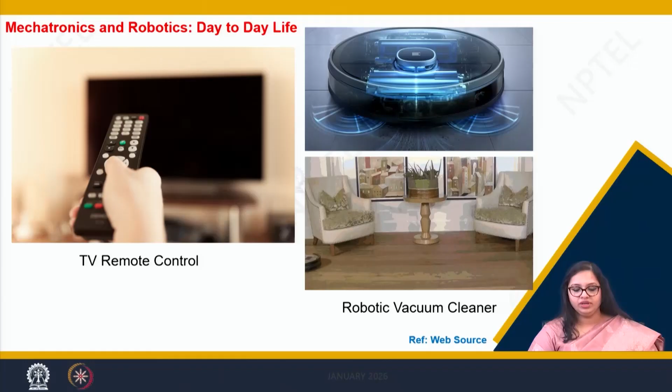Now, when we talk about the mechatronics and robotics application in mining industry, well, we have studied about dump trucks, where we know that dump truck is one of the most used transport machinery for transportation of material from one point to the other, and there may be various issues. Let's say there may be tire wear and tear issues, or fuel theft issues, or delay due to the irresponsibility of the drivers. Even there may be few accidents due to

many unwanted conditions. So it was very much necessary to make this kind of machine autonomous, which comes under the autonomous hauling system. Dump trucks we also call haul trucks. Making this haulage system was easier, as it is a repetitive process, and it was first made by Modular Mining Systems in 2011, where their system was installed in one of these Komatsu dump trucks, which is an unmanned surface haul truck. So it is one of the robotic vehicles used in surface mining applications.

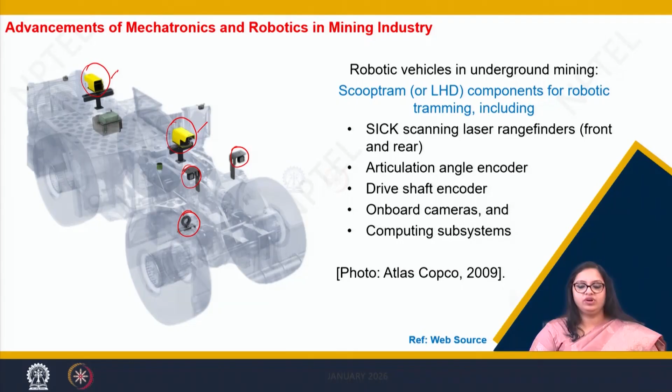So this kind of setup was developed by Atlas Copco in 2009. So this is one of the best examples of robotics that has been already established in underground mining. We may not be able to see this application in India, however, in different parts of the world, in various countries, this kind of technology has already been developed.

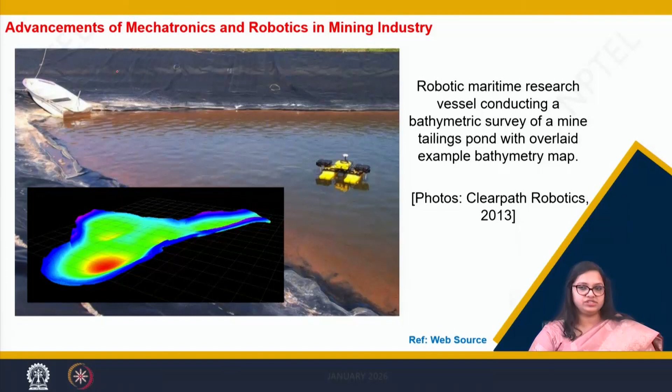Again, this project was by a company called Clearpath Robotics, and this photo was taken from their work that has been done in 2013. So now many works have been made easier due to the application of mechatronics and robotics in mining industry. It is no more as hazardous or dangerous as we have been perceiving.

Well, when we talk about why this evolvement of robotics is necessary, the first concern is the working environment. We know that there is a lack of workers. There are many officials or engineers who do not want to join the mining industry just because they are scared of this working environment. However, with the introduction of robotics, it would make the working environment in a mining industry much safer and cleaner, which will attract the best brains to work in this exciting environment.

Now there is labor shortage, as I mentioned. Due to this working environment, there is labor shortage, there is concern for health and safety, and that also affects the operational efficiency. If a working environment is not safe and is hazardous or dangerous to the workers who are working in that environment, it would also reduce the efficiency, leading to losses.

Now also the sustainability, which is a very big topic nowadays. This also plays a vital role in why robotics needs to be introduced in the mining industry, because if such technologies do not take up the mining industry, or we do not move to industry 5.0, then sustainability would be a big issue, and people would not be moving towards contributing to the development of these sectors.

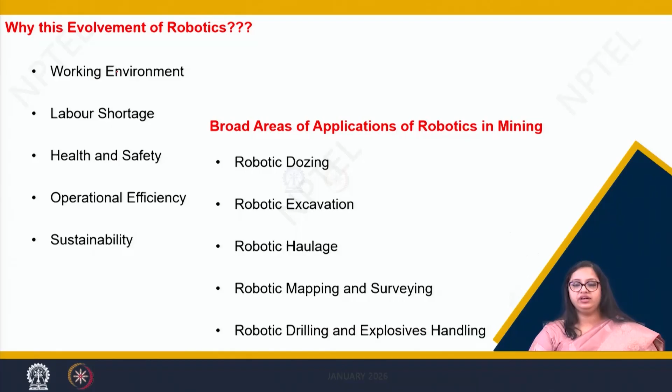Hence the broad areas of application of robotics in mining, which have already been done to a certain extent and can be more explored, are robotic dozing, which is a repetitive process that can be handled by robotics, or robotic excavation, or robotic haulage. We will be discussing a lot about robotic haulage in this PPT. Then robotic mapping and surveying, which can very well be done by drone technology. Then robotic drilling and explosives handling.

Well, when we talk about automated haulage systems, haulage is a repetitive process to which automation can bring significant benefits, particularly with respect to safety. When we talk about safety, haul trucks are involved in 42% of accidents and 60% of fatalities in surface mining conditions. Hence, if the haulage system is automated, productivity, repeatability and reduced maintenance cost would generate a lot of benefit.

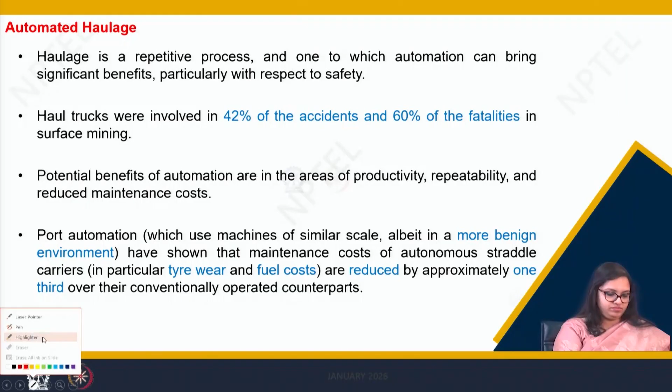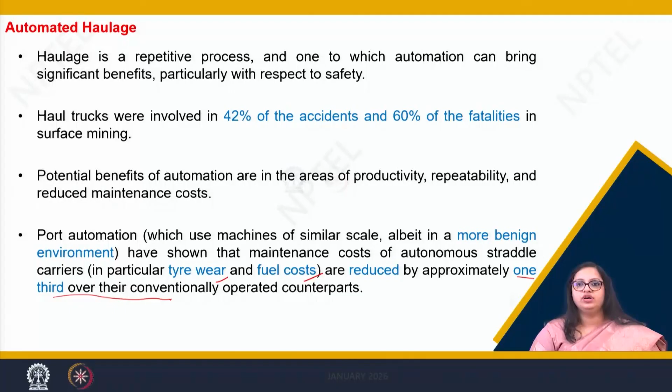Now, for automated haulage, port automation is one example, which is in a more benign environment. It has shown that maintenance costs of autonomous straddle carriers, in particular the tire wear or the fuel cost, are reduced by approximately one third over their conventionally operated counterparts. So automation in haulage systems, in port automation, has proved its potential of being used in the mining environment.

Now, while we talk about the mining environment where this automated haulage system should be introduced, there are certain unique challenges present in surface mining conditions which may not be present in other robotics applications. So, what are they? First is the scale. The haul truck carries up to 400 tons of material. So, if anything goes wrong, there will be huge loss of life and property.

Again, the mining pit, sometimes due to its depth, is restricted in GNSS reliability. So that is how the automated haulage system may get affected due to the depth of the mining pit, where getting signal sometimes gets difficult.

Now, when we talk about surface mining conditions, they are constantly changing. It is not like we are just staying at one place and working repetitively; this mining environment is always changing because the bench would be moving, and so the roads, approach roads and exit roads would also be changing.

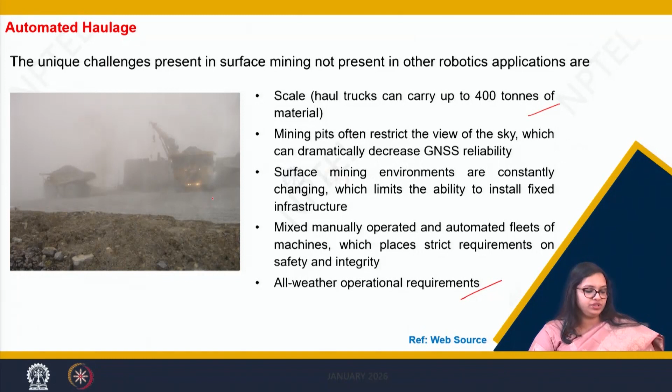So, in all weather, let's say you see here it is very foggy, so it may not be possible for the sensors to work properly so that the haulage system can move from one location to the other. Let me show you one example of a fleet management system that may be affected due to all weather conditions. Now, here you can see there is a rope shovel which is dumping the material into a haul truck. Now, how are both shovel and dump truck automated?

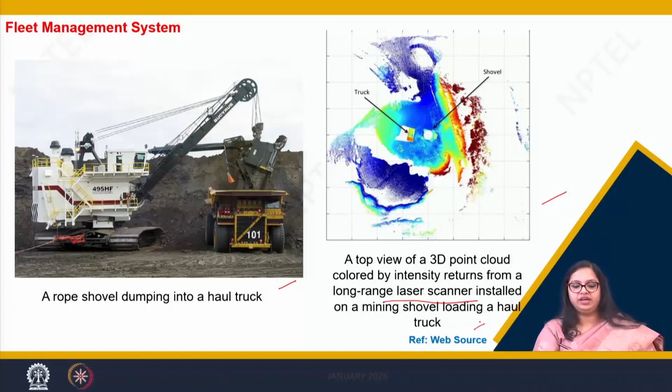Now, robotics and automation are also very helpful for the self navigation of the vehicles in the work zone and also in the approach or exit paths. So as you can see here, this is how the traffic is managed when there are automated loading units and truck interaction units. So how does it happen? Let's say at the face there is a shovel which is working, and it has different zones. One is a work zone, one is a handover zone, and one is a non-working zone.

So you can see there is a shovel operating at the face of the bench, and there is one incoming truck which moves from the handover zone to the zone where this shovel would be able to load the material into this dump truck, and then it takes a turn in the work zone and goes out through the outgoing path. So this complete thing is mapped by GNSS technology or laser scanners, which helps in appropriate movement of the machines inside a specific zone.

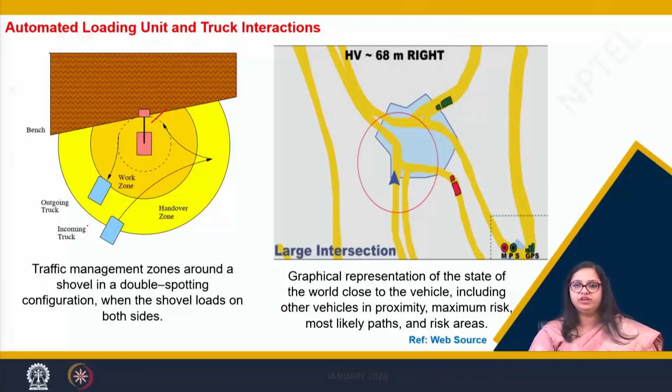Now when we talk about this GNSS technology, there may be multiple approach roads through which multiple trucks or vehicles would be coming. Now these trucks are also automated. When they are automated, it optimizes the fuel cost and reduces fuel theft, and when there are multiple vehicles at different speeds approaching a junction, they will be able to control their speed appropriately so that they can avoid any kind of collision. So this is done completely with the help of robotics and automation, where this kind of technology can help in smooth operation and movement of the vehicles inside a mining environment.

Now coming to another example of telerobotic rock breaking. So here you can see there is a rock breaker which is on an elevated platform and onto a grizzly. So here you can see it is a grizzly. Onto the grizzly there are rocks and boulders which are loaded. So this rock breaker can robotically break the rocks on the grizzly to a specific size, so that they can pass the grizzly without any human intervention. How is this human intervention avoided?

So let's say a mixed reality user interface is developed, where on a platform a rock breaker is designed and a grizzly is also designed. So you can see in this picture there are multiple cameras looking over the grizzly. Here is another camera looking over the grizzly, and while this camera takes the data, it would form a 3D image of the boulder on the grizzly, and with the help of signals this robotic breaker can be given instructions to apply this much force and attack at this angle, so that the rock boulders divide into smaller pieces.

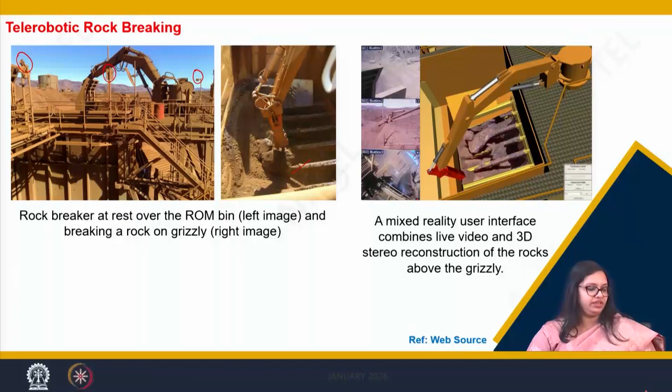Now coming to the basics of mechatronics. So what do we understand by mechatronics? Well, we went through some of these examples where we could see the applications of robotics that have already taken place, how with different technologies we can make a vehicle humanless, or we can make it unmanned and operate it without any human intervention, how we can increase the efficiency, how we can increase the safety. But what exactly is this mechatronics and how can it be utilized for such purposes?

Well, we have understood what a mechanism is, and the electronics component and the details of it you will be learning in the second half of this course, or you may be getting this knowledge from other courses. So when you add up mechanism with electronics, it gives you mechatronics. Mechatronics is enhanced mechanics with electronics. Now mechatronics does not only involve the knowledge of mechanical engineering, but it also involves the knowledge of computer engineering, electrical engineering and controls engineering.

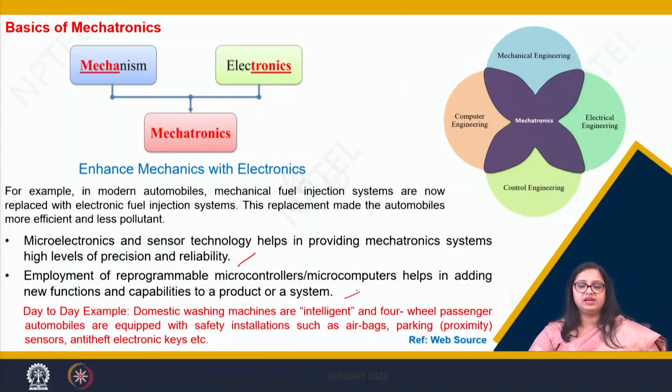Now when we talk about the components of mechatronics, one perfect example is the spring force system. This is one of the easiest problems of mechatronics, where let's say there is a spring without any particle. Now a mass is added to the end of the spring. This gives us a certain displacement. The force is the input and the displacement is the output.

When we talk about this force coming to the spring and we would like to automate it to a certain level, let's say the force is induced into the spring and it changes over time, then a system can be devised so that it will have a displacement or vibration to a certain level, and that can be automated by getting the output displacement and feeding it into a microprocessor, which would send the signal for the input force to increase or decrease, and so the process can continue. The same example we can see in a mechanical system.

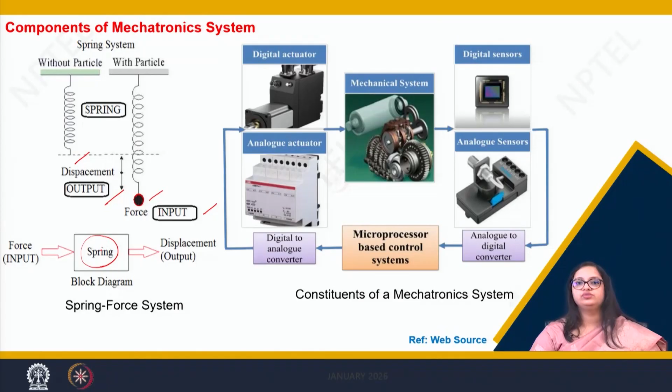Let's say it is giving to a digital actuator, so this digital to analog converter is not required in between. The microprocessor can directly give it to the digital actuator. However, if it is giving to an analog actuator, it has to convert the digital signal to an analog signal, which would give the signal to this analog actuator. Again, this analog actuator would send the signal to the mechanical system to decrease or increase the generation of the power. So this is one classical example of a mechatronics system.

Now the same thing we can see if there is a hydraulic piston cylinder system. As we have seen, many of these machines are hydraulically controlled. So this hydraulic piston cylinder system would give the signal to a piezoelectric device or a strain gauge about the displacement that is happening or the pressure that is built up inside this piston cylinder arrangement. The strain gauge or the piezoelectric device would send the signal to a signal conditioning device, which will condition the signal to a level that is readable.

Then from the signal conditioning device, the signal will go to the analog to digital converter. It is necessary because if it is an analog signal, it has to be converted to a digital signal so that the microprocessor can understand. Let's say I am from India and you are from China or some other country where we have a different language. So if I am speaking something and you are not understanding, or if you are speaking something I am not understanding, then the communication will not be effective. So that is why for a microprocessor to understand the signal, it has to be converted to the language it can understand. So an analog to digital converter is required.

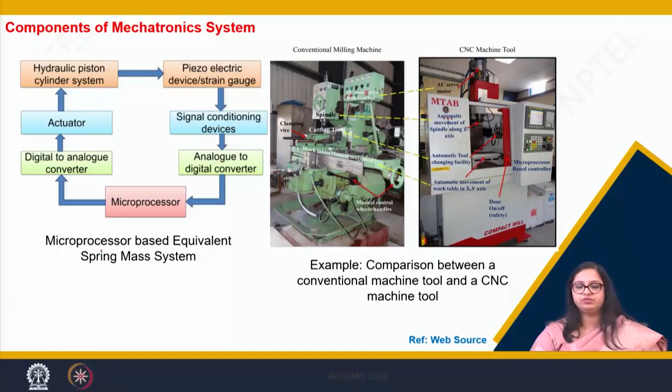Now a perfect example of all this we can also see between the conventional machine tool and the CNC machine tool. In the CNC machine tool, there is a microprocessor based controller which handles or automates the movement of the cutting head. However, a conventional machine tool has to be operated manually.

So the vision of the mining industry is to have a teleoperator station 100 to 200 kilometers away from the mining site where they can operate the machines without human intervention, which would not affect their health and which will also not interfere with their safety. So this is the vision that we are looking for, and this is why the course has been designed appropriately, so that you have the knowledge of mechanical systems and also of electrical systems and IoT and AIML that you'd be studying in modules 3 and 4, which will give you a depth and breadth of what is actually required for the upcoming mining industry.